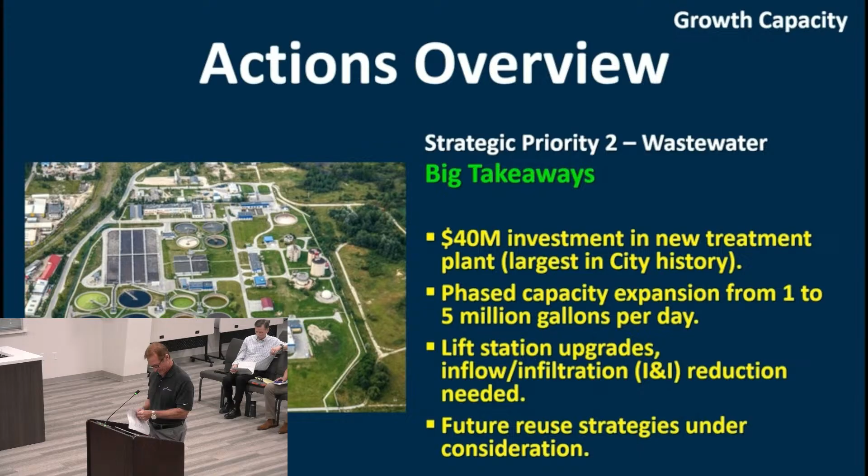Also, transitioning to Atlas 14 rainfall data will help ensure your system is future ready. That's what everybody is adhering to now, and it's actually more rainfall for certain events, like the 100-year event, additional rainfall. So your systems that were designed to the old criteria are going to be affected. That's something you've got to consider. And then, continuing strategy includes strengthening your partnerships with GCWA, TxDOT, and the county for regional coordination and cost sharing.

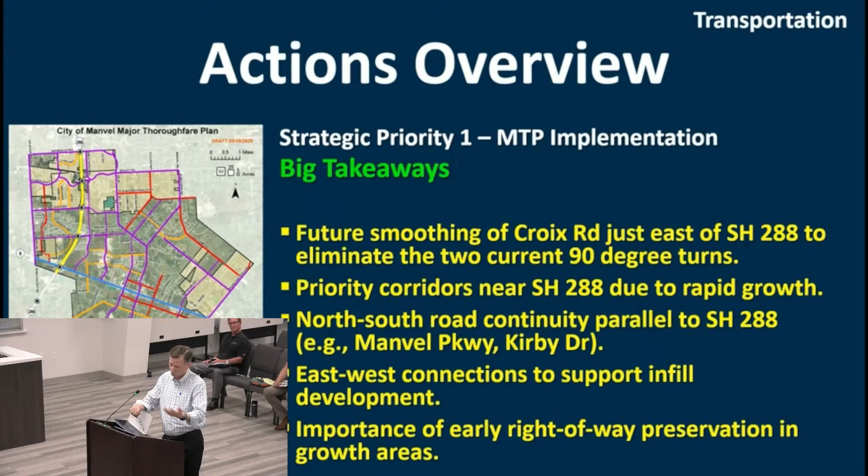So the final item there is, as we've talked about tonight, just trying to preserve right of way, whether the road's going to be built immediately or sometime down the road. Priority 2 is that emphasis on management of what you have. I was going to ask James to touch on this one, because these are some of the things that you wrote up for us.

As Gary mentioned, this is more maintenance than anything else, but you've got to maintain your infrastructure for it to last. The city staff uses a pavement condition index to prioritize their road projects, which include converting gravel roads to pavement, improving school zone safety and sidewalks, and also signals. The city's also looking into increasing the width of many of their streets.

So you've got a lot in front of you. The rehabilitation and maintenance of your streets and conversion of those gravel roads is upwards of $3.4 million. It's an expensive proposition. And then widening to a 26-foot wide width is probably about the same amount. So it's going to be one of those things you just have to systematically go through and prioritize each of those projects. Thank you.

Thank you, James. I just want to emphasize that first point because, for a city at this stage of growth and still being relatively small, the fact that you're using that system to monitor your roadways is very important. I'm not the engineer in the room, and in layman's terms, sometimes you think that road is in awful shape and that should be first priority. Really, when you use the index system, it's the ones that aren't there yet that you focus on, so they don't go over the tipping point where it's a major reconstruction project. So it's balancing limited resources with all the things you need to maintain.

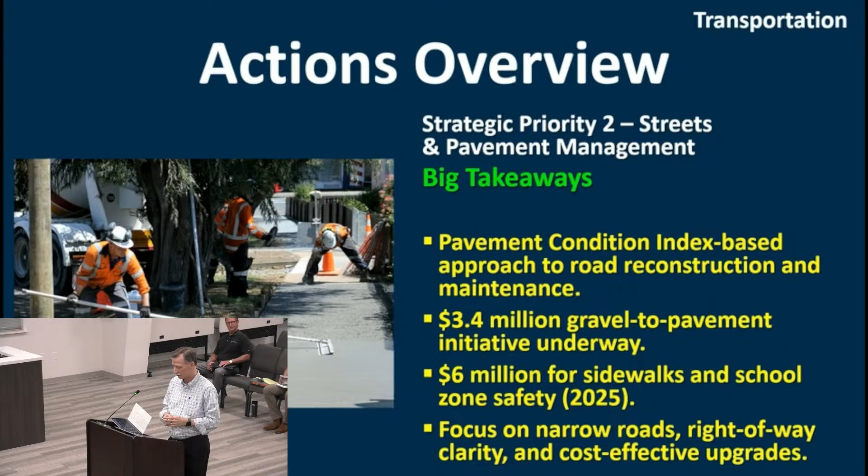So the third one is similar in terms of managing what you have, and this term, transportation system management, is a whole approach in the transportation world, using technology, your signal systems, and maintaining traffic flows and safety. There's a movement across the country in recent years called Vision Zero, which is, when you look at the numbers, it's just incredible the number of deaths and injuries we deal with in this country in everyday travel.

So there's an effort to ideally bring that down to zero, but especially focusing on pedestrian accidents and slowing traffic. So sidewalk and bike infrastructure—again, we have to prioritize everything we do with limited resources—certainly around school areas and park areas as the community grows.

The final one is kind of a philosophy point again: try to coordinate your utility and roadway work so you dig once and take care of multiple things at the same time, as well as drainage work. So we're going to switch gears here to the Major Thoroughfare Plan map.

Some of the things we observed about the current map, or the Thoroughfare Plan in general, is it's certainly a reflection of how Manvel is growing, where it's growing, the development pattern that's emerging. We did have some early meetings with Brazoria County staff and with TxDOT just to compare notes about what they're doing at their level. Brazoria County has its own Major Thoroughfare Plan, so that's a consideration.

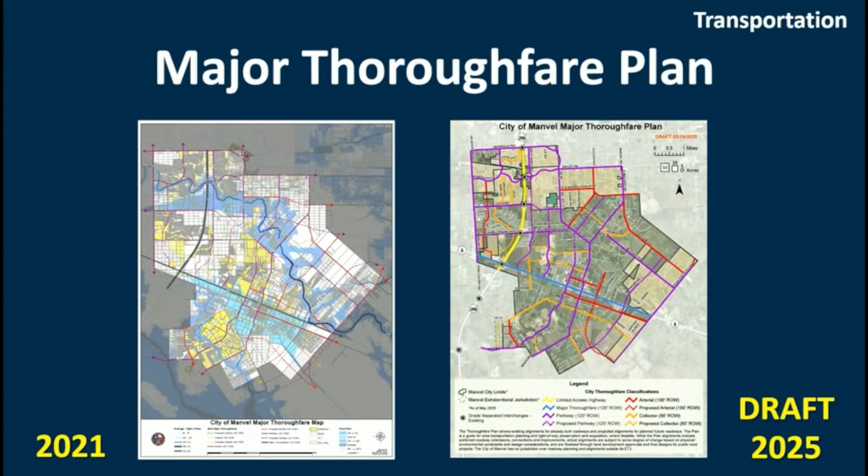It actually came up tonight - Rodeo Drive between Croix down to Rodeo Palms Parkway, and then on the map there's a dashed extension of that down to Kirby, kind of in the Manvel Town Center area. We had put that on the map at one point. It's back off the map. It's not going to show up on the map tonight, the latest map - it's off the map, for various reasons. So as we get to that... The dash part from Del Bello down to Kirby? And the Rodeo Drive existing portion is also taken off.

Okay, wanted to focus on the legend first and just refresh on the different types of roadways. Limited access is 288 - it's the same as the county designation for a freeway that only has interchanges. You can only get on and off at certain points. Major thoroughfare is only Highway 6, so that's how that shows up on the map.

Parkway is largest in terms of right-of-way along with Highway 6, so it's meant to be your larger roadways, although with that Parkway designation it's thinking about multi-use - you could have a generous trail path on the side, shared use, could be bike, pedestrian, landscaping, medians - so that's part of the right-of-way consideration. Arterials are kind of the next step down, and as we look at some specific examples we can talk about that more. It's going from roadways meant to move traffic longer distances, higher speeds, working down to the collector level where it's more about getting to neighborhoods, getting to shopping, more of a local function. So that's that spectrum of roadways.

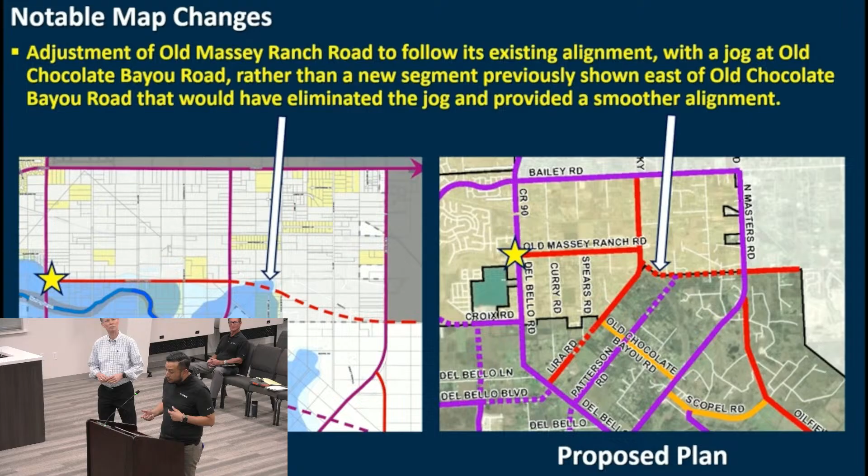Some of the notable changes we've made to the thoroughfare map - keep in mind the 2021 plan will be on your left, the proposed plan on your right. We adjusted the old Massey Ranch Road to follow its existing alignment with the jog at Old Chocolate Bayou Road, rather than a new segment previously shown east of Old Chocolate Bayou Road that would have eliminated the jog and provided a smoother alignment.

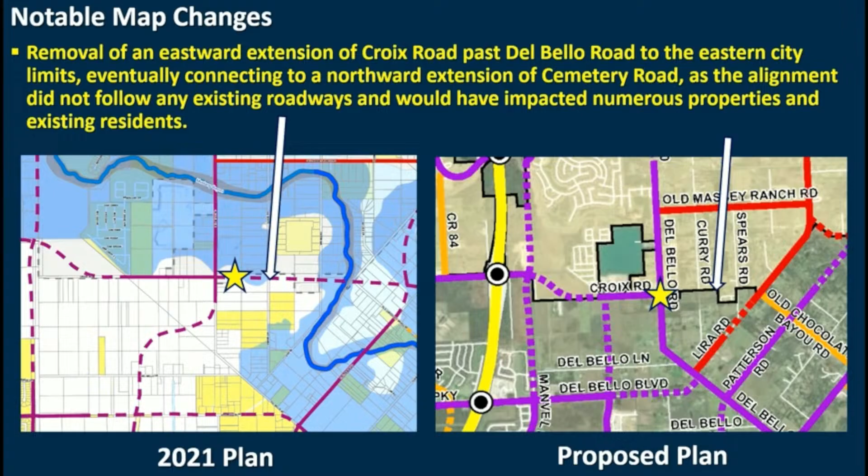Another notable change is the removal of an eastward extension of Croix Road past Del Bello Road to the eastern city limits, eventually connecting to a northward extension of Cemetery Road, as the alignment did not follow any existing roadway and would have impacted numerous properties and existing residents.

We also adjusted the north end of Patterson Road alignment to continue in a northerly, easterly direction and eventually connect to another existing segment of Patterson at Old Massey Ranch Road. This removed a previously shown northward turn of the Patterson alignment that would have connected instead to Old Chocolate Bayou Road, north towards Bailey Road.

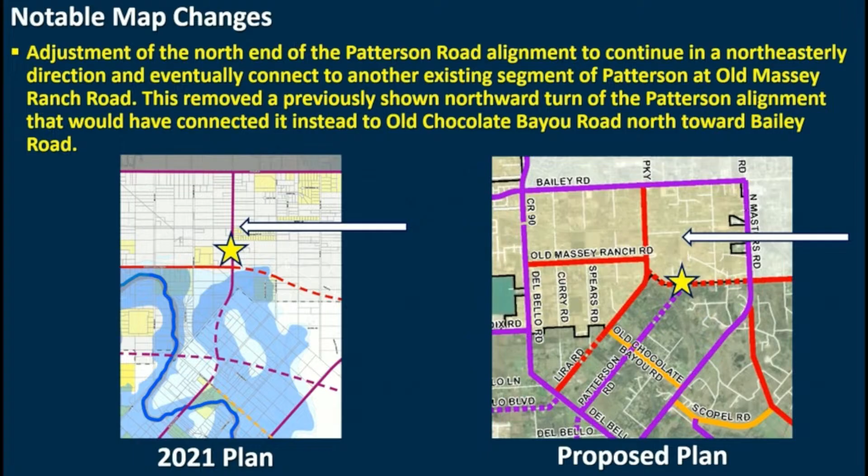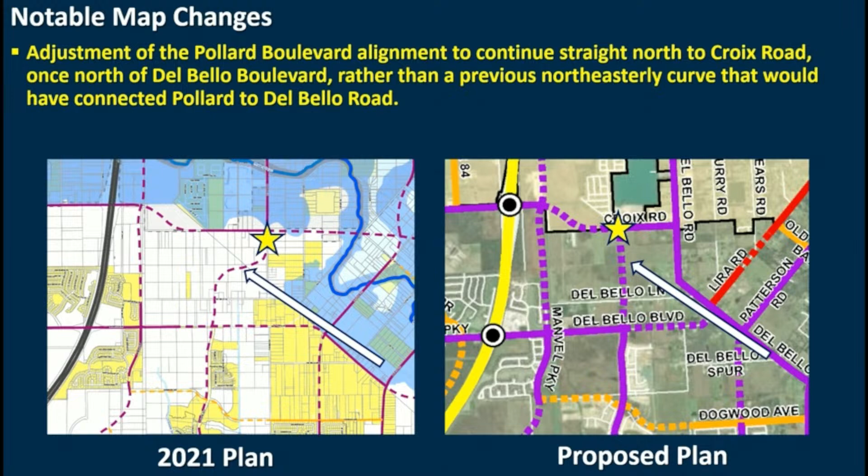I just want to mention, as we're showing you these, the connections on the current map make sense - you're trying to connect A to B. But it's considerations like water crossings, going through multiple properties, and impact on existing residents. People who aren't familiar with Manvel may think it's a lot of country out there, but no, there's a fair number of people living on larger properties. So taking roadways through properties versus following property lines where we can - that's the challenge.

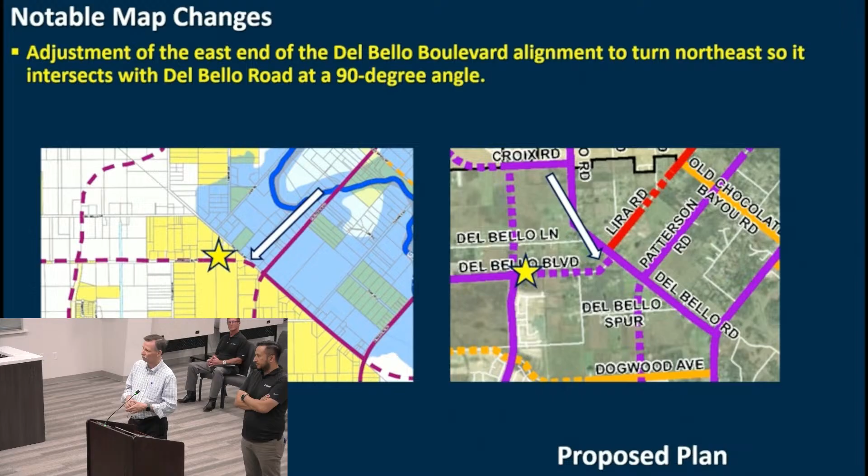Thanks, Gary. Moving on, we also adjusted the east end of the Del Bello Boulevard alignment to turn northeast so that it intersects with Del Bello Road at a 90-degree angle. This will provide for a smoother and safer alignment.

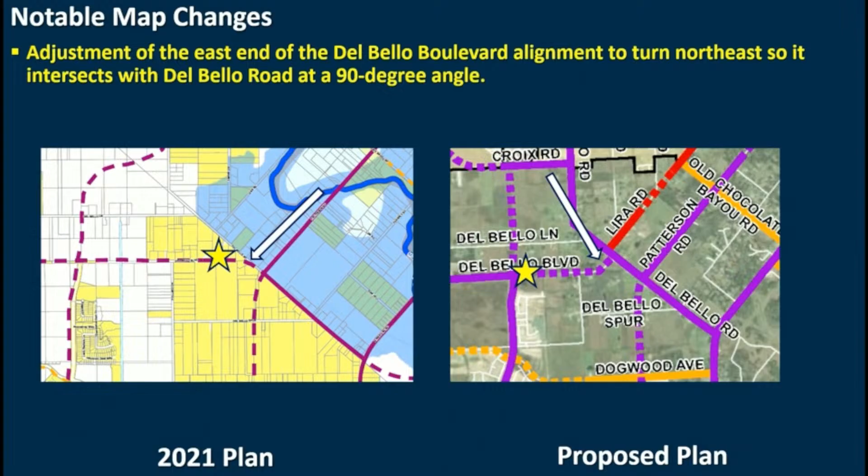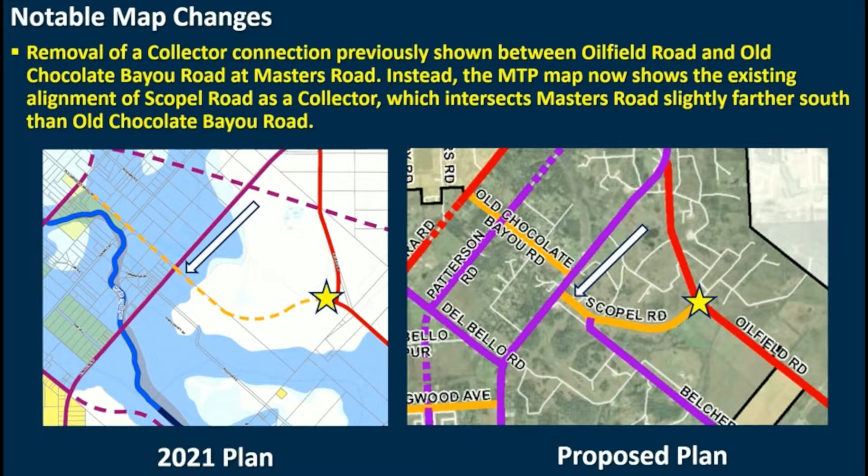The thing I'll mention here is, again, you'd love to make that connection, but it's an area that on the future land use map we're going to show as more of a rural flavor. There's been the idea that toward the 288 corridor, where growth is happening on the east side of the city and ETJ, we're trying to maintain as long as we can a more low-intensity, less-developed atmosphere. So another reason to use existing roads and not carve a new road across an area - it's that resource aspect too. You've got existing roads you're already needing to maintain, so potentially building another road through that area adds cost.

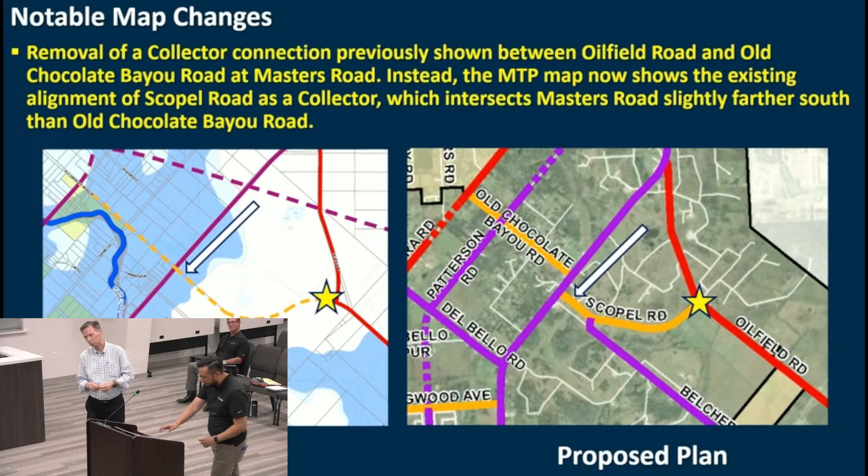In the same vicinity, a parkway designation now stays on the existing alignment of Belcher Road all the way to Masters Road. The previous map showed an entirely new alignment that would have had to cross Mustang Bayou to connect to Bello Road at Masters Road.

The arterial designation on Cemetery Road now stops where the road turns northeast at Scott Avenue and no longer extends all the way to the ETJ boundary north of Oilfield Road. All of the alignment changes on the northeast are consistent with the aim of preserving more rural character, as indicated on the future land use and character map.

The thing I wanted to mention on this one is Lewis Lane, we may need to take down to collector level now. We talked about going west with the high school, it can't really continue. On the east, as you see on the old map, it was meant to eventually connect all the way to Highway 6. Now that it's just going to be that short existing segment, it doesn't really make sense to be designated as an arterial, so probably take it down to a collector.

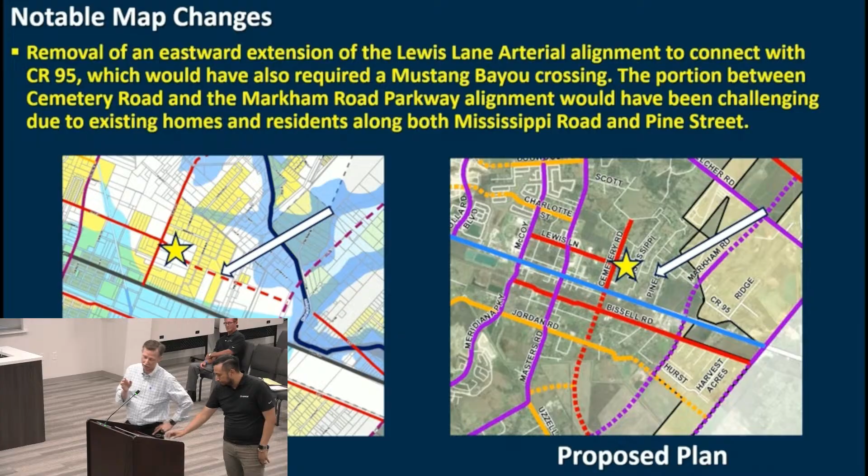What about cemetery at that point then? Same idea. We're getting to the rest of cemetery south of Highway 6, I believe, in one of our next slides. That was one of the considerations for potentially keeping it as arterial, and we'll go ahead and talk about it now.

We've got Pearland Sites on the left, of course, on the current map was kind of making a southeast turn. We've just got it straight now on the south side, south of Highway 6. But that extension, that red dashed line coming down, is a cemetery road extension. The critical thing there is, can you cross the railroad? Realistically, it's going to be tough when you've already got multiple crossings. Railroads are really bad about not allowing it.

Well, and just the expense of doing that, I'm sure. You have to count the cost too. Yeah, so it's one of those, ideally, if this southeast area of the city limits develops, these are the kind of roads you need to bring people up into the center of the city, up to Highway 6, multiple ways around once again. But that railroad crossing is going to be difficult.

But that goes back to your point about, we have it red right now as an arterial, thinking that if it was on both sides of Highway 6, realistically it may be more of a collector, if it was carrying lanes of traffic. As a collector, it doesn't make sense that Cemetery would be an arterial.

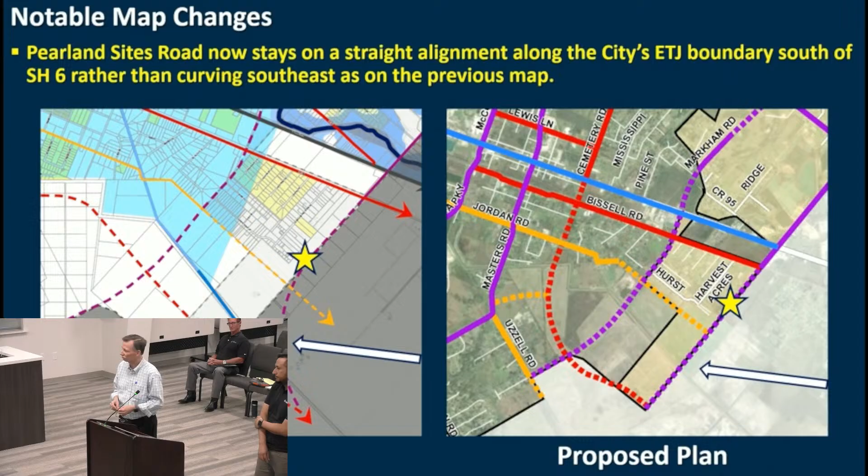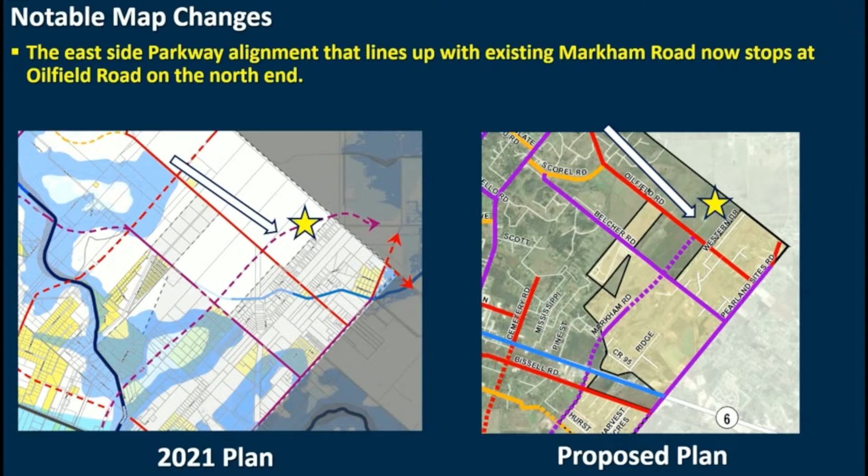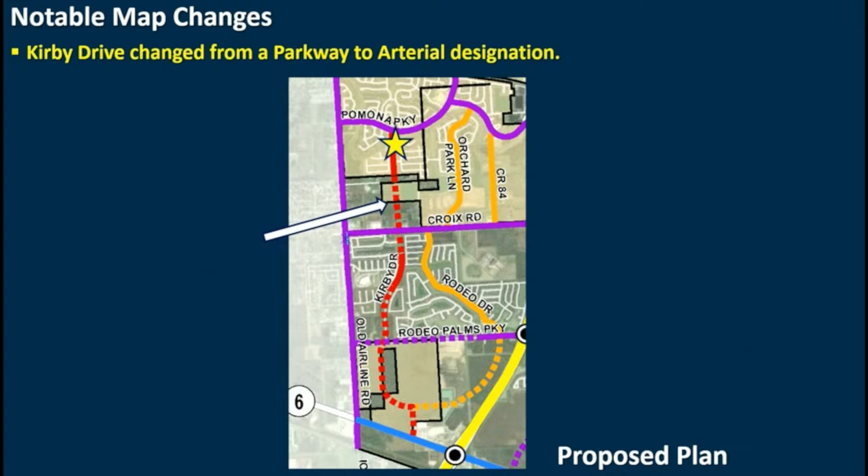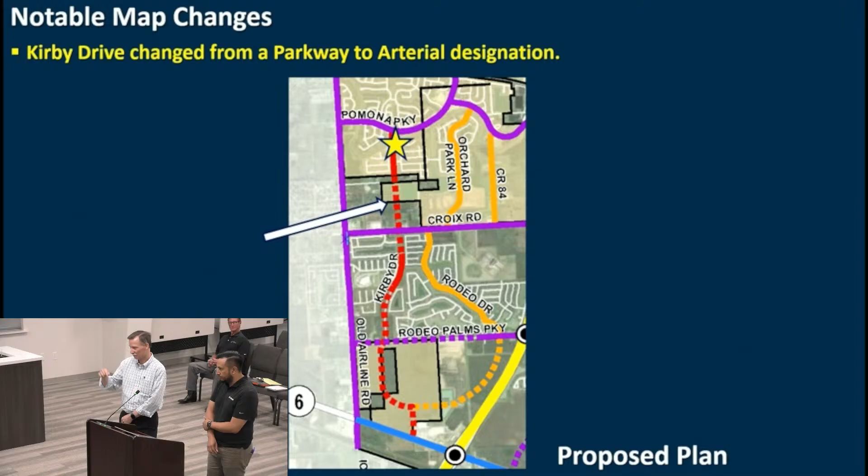I'll continue. So now the East Side Parkway alignment that lines up with the existing Markham Road now stops at Oilfield Road on the north end. And Kirby Drive now is changed from a parkway to an arterial designation. Part of the discussion there we had with staff is that Airline is the parkway, the higher designation. They're fairly close together, so Kirby kind of serves a next level function if we can get all those pieces connected.

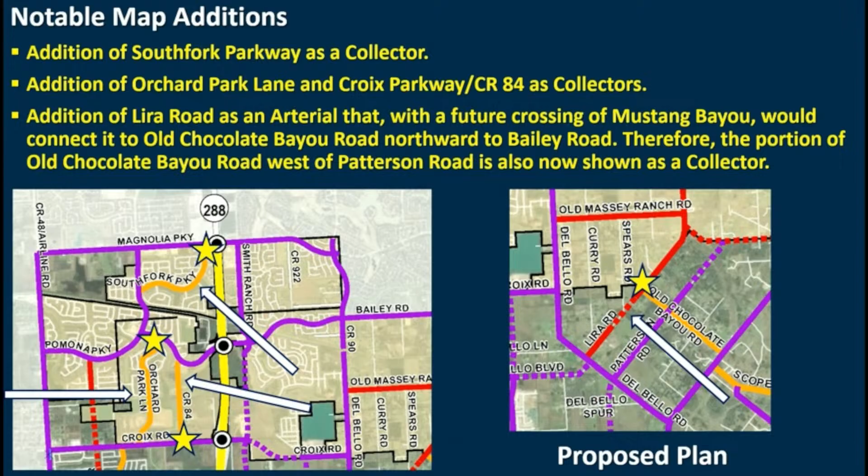So now I'll go over the map additions. The addition to South Fork Parkway as a collector, as well as Orchard Park Lane and Croix Parkway as collectors as well. We also have an addition of Lira Road as an arterial that, with the future crossing of Mustang Bayou, would connect it to the Old Chocolate Bayou Road, northward to Bailey Road. Therefore, the portion of Old Chocolate Bayou Road west of Patterson Road is also now shown as a collector.

Another addition is the new south extension of Cemetery Road from State Highway 6 as an arterial that starts to curve to the southeast after crossing Briscoe Canal, reaching to the southernmost point of the city ETJ at an intersection with the Pearland Sites Road extended alignment. We also added a short new collector alignment between Masters Road and the new south extension of Cemetery Road. As a result of the alignments added in the south side area, a more east-west arterial alignment from the previous MTP map going east from Masters Road was removed.

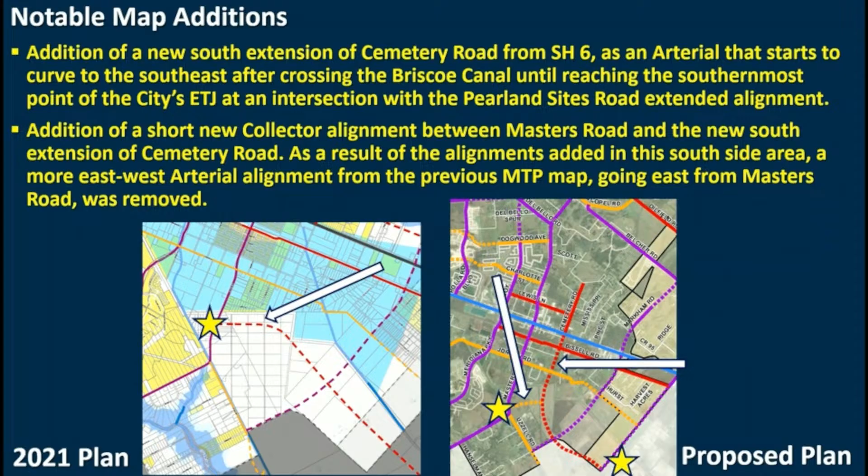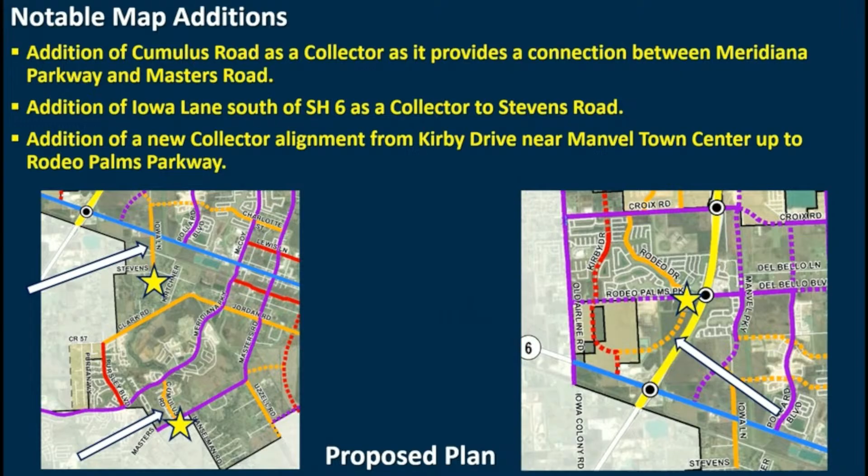Thank you, believe that is it. The thing I was going to mention is, when you're looking at the thoroughfare plans, I think I've said it about three times, it's the ideal, it's the aspiration you're aiming for to make connections. It's not always going to work, and sometimes we keep lines on the map with that hope that if the right pieces come together, we can make a connection.

Just because something is not on the map, you never know what might come through a development proposal or master plan. If somebody puts together a number of properties into a large piece, you may see a connection concept that isn't even thought about on this map. So it's something that can evolve over time, and that's why we're updating it again—it's been updated several times over recent decades.

We'll leave it there, Mr. Chairman. I know we gave you a lot of information, but we wanted to establish the infrastructure and transportation aspects so we can come back and talk land use.

In 10 to 20 years, it could be anything. This map will look different, but we have to have a plan. There's a plan in—this is a start. It was very interesting. Thank you very much.